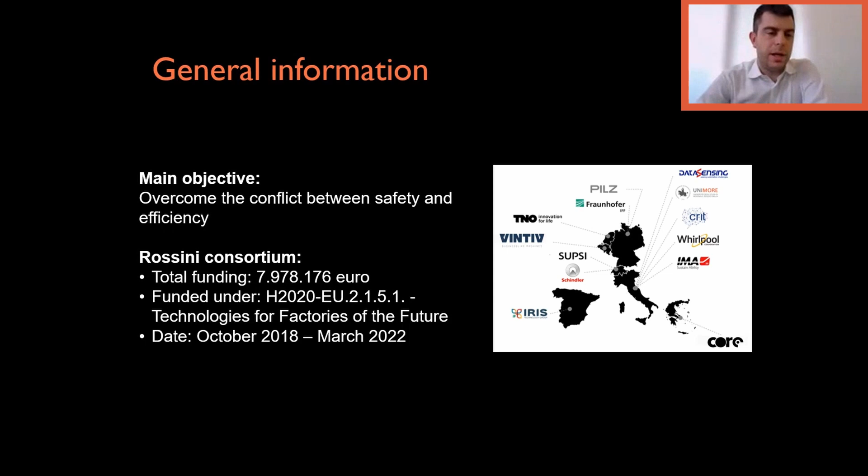In order to reach a goal as big as overcoming the conflict between safety and efficiency in human-robot collaboration, having on one side traditional robots that are very fast and efficient but not safe for the operator, and on the other side cobots that are intrinsically safe in the interaction with the operator, but very often they are stopped or not as fast as the traditional robot.

We understood that we were forced to work at multiple levels, not only on the sensing part of the cell and the environment, but also at perception level, cognition, and control level.

In the Rossini project, we did work on the sensing part as Datalogic, together with PILZ, developing 3D cameras and a cluster of laser scanner and radar that are basically collecting information from the field, used by the controller to allow the system to recreate and make different actions that are not possible with current technologies.

In particular, we are able, through our planner, to give tasks to the human and to the robot in their interaction, changing the task if we see that the operator, for example, is tired or a little bit slow compared to what's scheduled. Apart from that, we have a complete understanding of the scene, and we put all this information together with the semantic scene map.

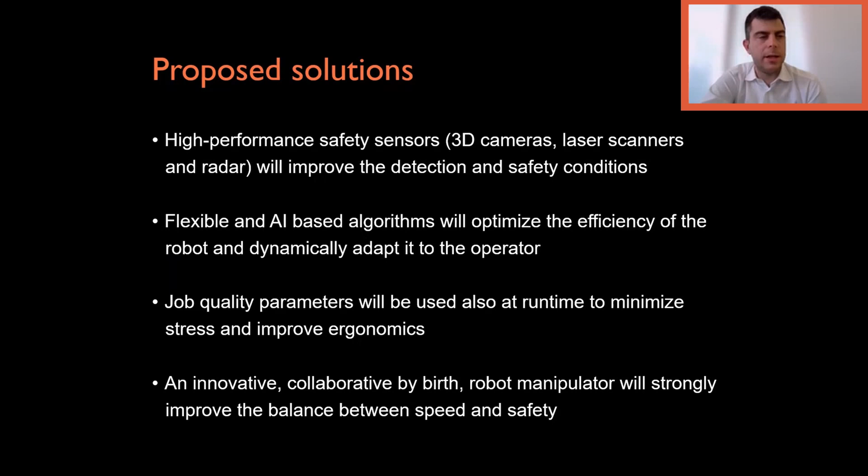At the end of the day, all the technologies that we have developed are used by our use cases. The three use cases cover a large range of human-robot collaboration applications within the manufacturing industry, but many of the technologies are applicable in different fields.

Project Rossini is unusual, so usually for people familiar with funded projects, they are coordinated by R&D centers or universities. In this case, it has been coordinated and led by industrial partners.

The idea from the very beginning was to develop technologies able to solve issues in different problems in different fields. This was the main idea. So while selecting the use cases, we worked with entities with different problems or different interactions with the robotic manipulator.

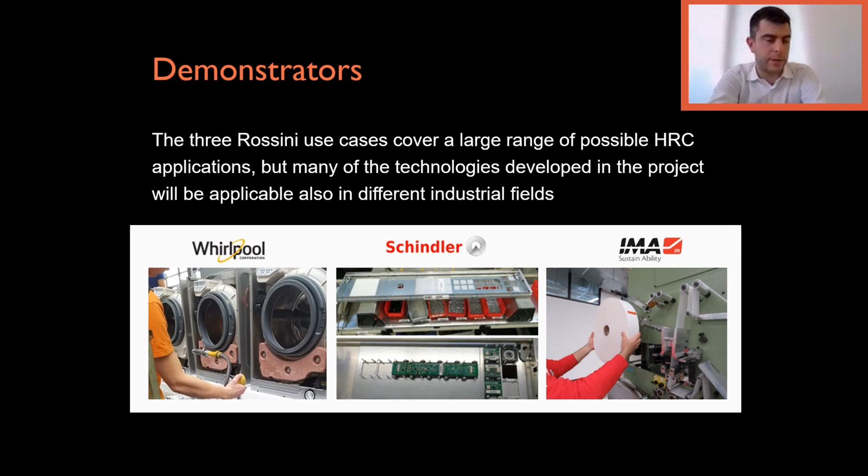If we look at the challenges we face with the project: in the Whirlpool use case, as you will see, we have a continuous flow line working with heavy products at high speed. This is very challenging because you have to consider a high payload on one side, placed at a certain height that is dangerous for the operator, and the high speed of a continuous flow line.

The Schindler use case is more close to the traditional application for cobots, and here the main challenge is the high production variability. The IMA use case has challenges that are very different from what's seen in Whirlpool and Schindler.

In this specific use case, we have to manage indoor navigation and the interaction between the robot arms and the operators. So on one side we have the navigation, and on the other, to control multiple arms in a specific area that is shared with multiple operators.

I leave the floor now to the three use cases. This presentation is dedicated to them and the solutions that have been developed within a project that is close to its natural expiration, at the end of this month. So I want to thank Riccardo and all the use cases, and welcome again to this presentation about Rossini and the technologies developed for its use cases.

Thank you very much, Matteo. And so now let's start the use cases illustration with Miroslav Hornicak from Whirlpool, who will explain how the Rossini solution has been applied to a domestic appliance assembly line.

Okay, thank you very much. So I'm Miroslav Hornicak. I'm from Whirlpool EMEA Corporation, and I'm an industrial engineer. I was responsible for the Whirlpool use case.

So, needs and challenges, as was presented before: our use case involves a heavy payload. At the beginning of the project we had two different possibilities, because in our location we manipulate heavy payloads with these concrete counterweights in our products.

So we have two, as I said, different options: one is stop-and-go, and the other continuous flow. The main goal is that in the current state the operator needs to manipulate it - take the counterweight from the container, assemble it to the washing unit, and fix it.

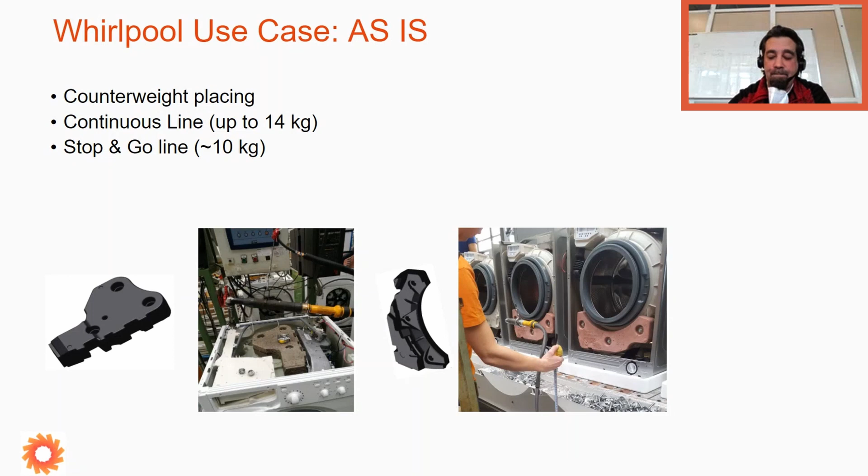The objective of our project, our use case, was improving job quality and, first of all, the ergonomics of our operators, because as mentioned before, the payload of one counterweight is approximately 14 kg, so it is really heavy and not good for the operator's health.

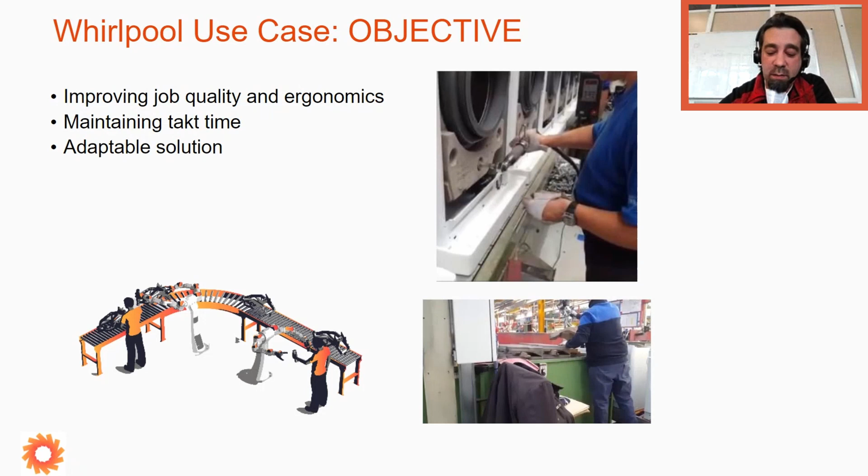What we wanted to solve during our project, and the big challenge, was this heavy payload for the robot, because when we calculated the final payload compared with the 14 kg counterweight and added the weight of the final gripper - an important part of our use case - it came up to 40 kg, not 14.

Respecting the takt time, for the Rossini solution we foresaw one big robot arm driven by the RS4 system. Our first goal was the standard industrial one, and to redefine how we work with this counterweight - since we will replace the hard work of the operator, we need to redefine the work for the operator as well.

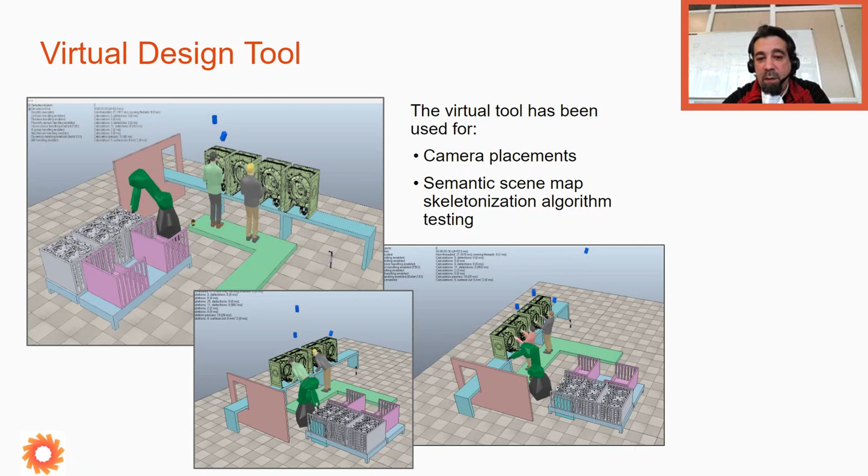So what we used during our mission in this use case was this: at the beginning, the virtual design tool to find the right placement of the camera, using the semantic scene map, skeletonization algorithm, and all the testing in the virtual world before we finalized our layout.

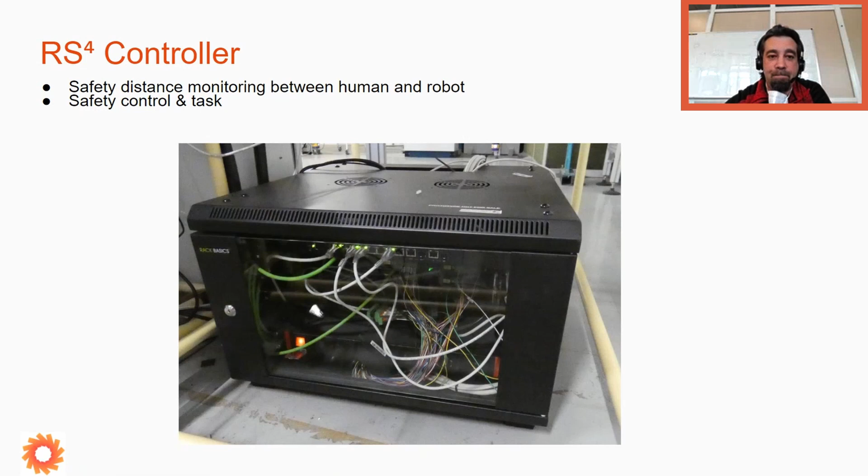Then an important part of our solution is the RS4 controller, which takes care of all our safety aspects, all our safety tasks, and monitors the distance between the human and the robot.

This RS4 controller is connected to Datalogic 3D safety cameras, which are placed according to our virtual tool in a specific construction to cover all our needs, from the dangerous zone and also from the collaborative point of view.

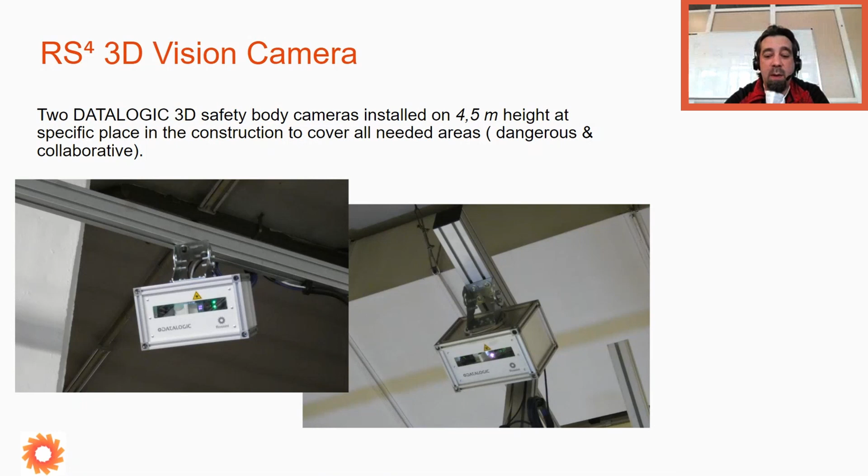Then in our use case we are also using standard laser scanners - three in this case - and these have two different functionalities. The first is to cover our whole workplace, to inform our system that something is inside and to monitor the area. The second functionality is stopping in dangerous and forbidden areas.

Next safety device developed in our use case is a soft skin developed by Pilz. We implemented this soft skin directly to our gripper, which now we can say is a collaborative gripper, because we used the FANUC CR35 robot, which is already collaborative, but during the assembly of the counterweight, according to this big payload, we need to turn off this collaborativity function of the FANUC. We replaced this functionality and put the safety functionality directly on the gripper, because this gripper is the nearest part close to the operator where we can react to these activities.

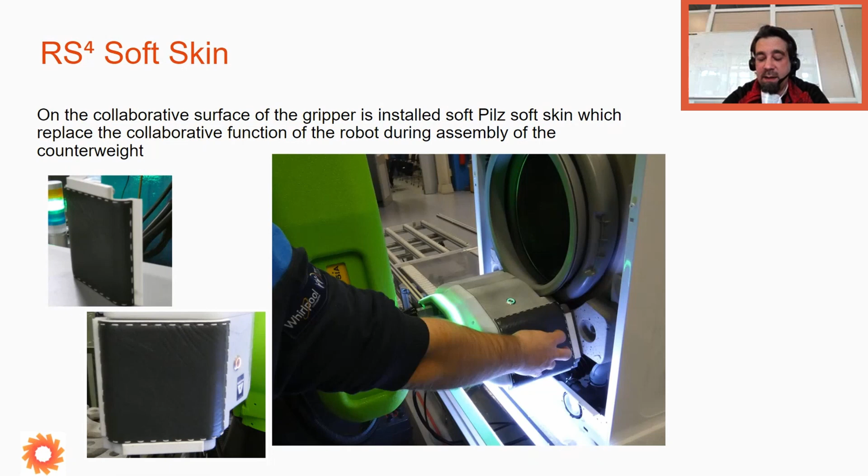In the continuous flow mode, we are under the safety speed, under 250 millimeters per second. So in this case, we can guarantee that our gripper, using this soft skin, is safe and collaborative.

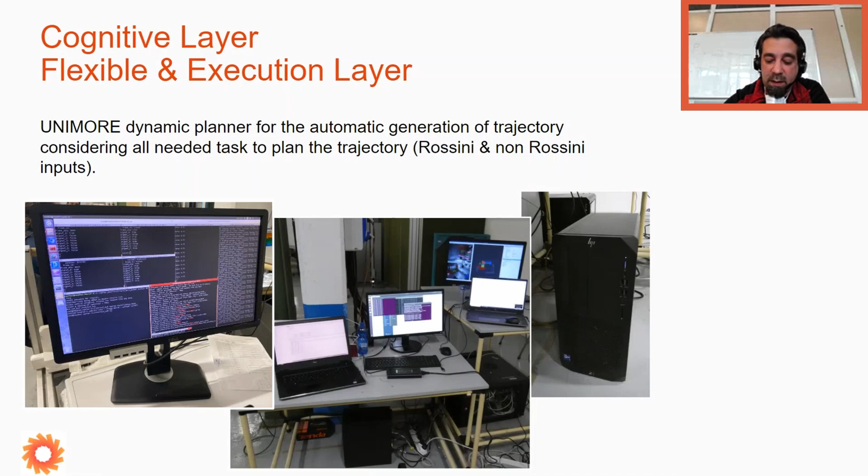The next part of the Rossini components we use is the WP4 PC, where we have installed the ROS system, and all this system is driven by the final motion planner and final execution layer. With ROS we control all the tasks about the trajectories of the Rossini inputs and non-Rossini inputs, because in our use case we are also using a lot of different inputs which are not connected directly to safety, like the camera system and additional sensors which control our final takt.

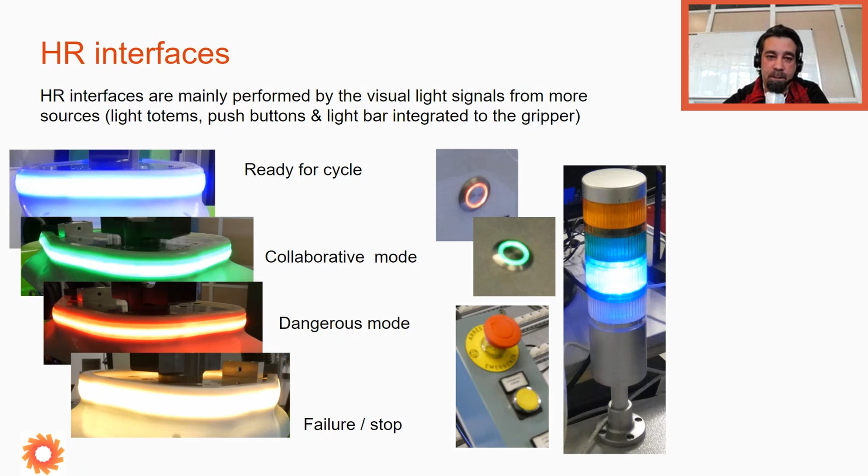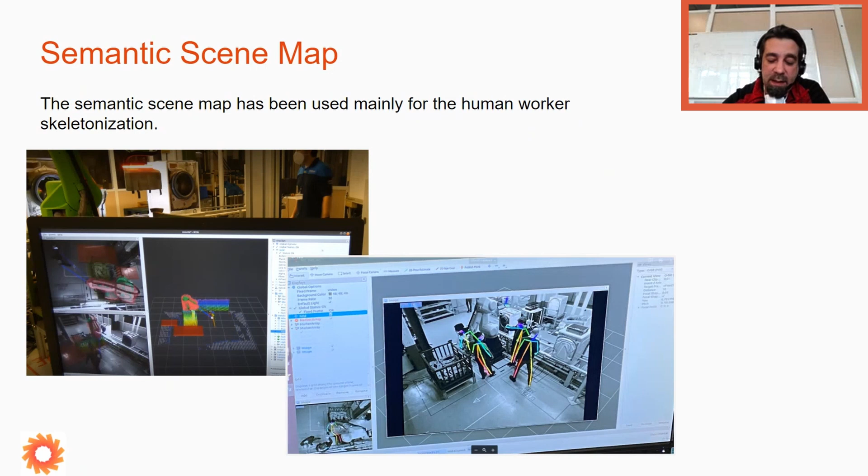This is our final use case. It is installed in our TWI area, which means training campus. I can briefly introduce you to the layout.

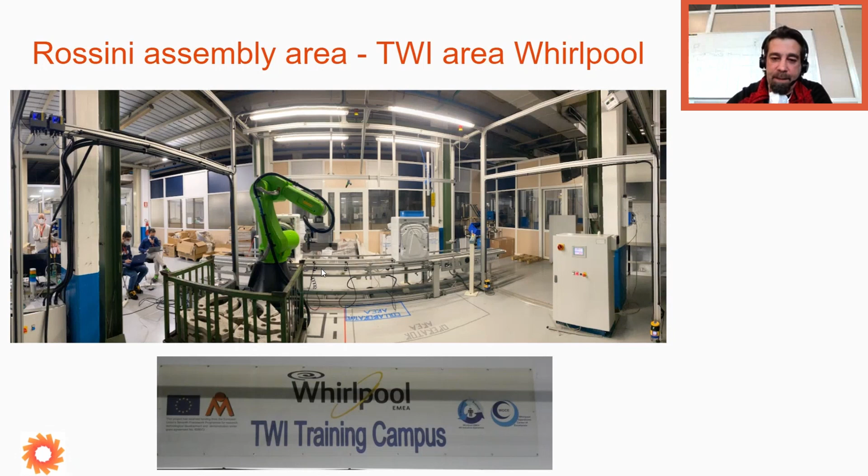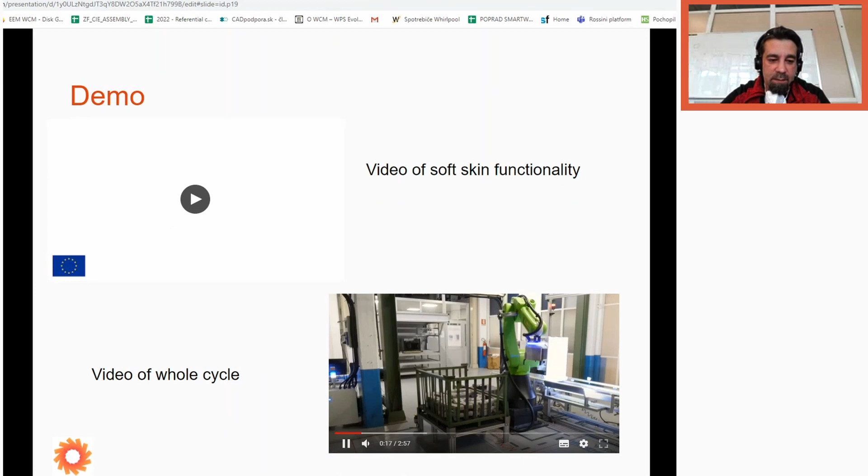Okay, and now I can show you the videos from our final integration. Just a second, I have some issue. Maybe I can do it a different way. Okay, now it's working.

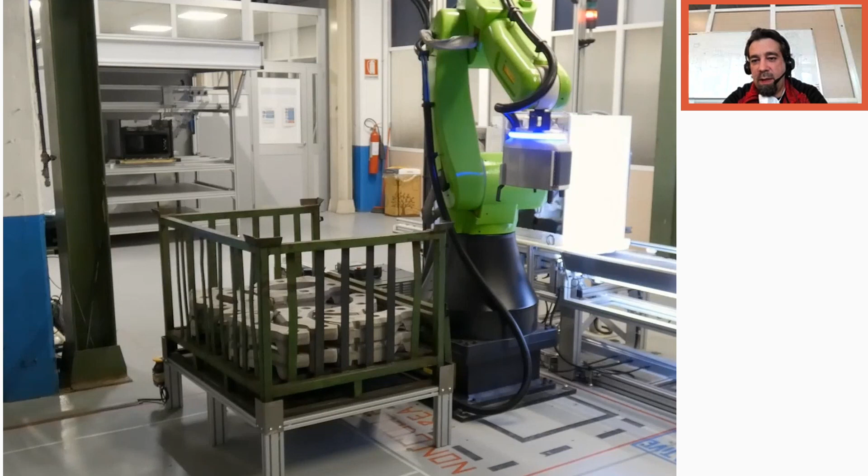This is a whole cycle. So now you can see the robot is prepared, the blue light is turned on, and we're waiting for the information from the line to start the cycle.

The washing machine is moved. When the robot goes inside our dangerous zone, meaning our pickup zone of the counterweights, the lights change. Let me explain the functionality of this safety scanner.

So when I go inside, as you can see, the robot was stopped. When I go out, the robot can move and finalize the cycle. So it is done automatically.

So we go on, down, turn on the suction system, and go up to the safety position.

Then when we are in the safety position, we close the gripper, so we are holding it in a safe way. This stopping is driven by the RS4 camera system.

We're going to the mounting position. So now the robot changed the rotation. The camera system finds the right coordinates. Now we're going to perform the final assembly.

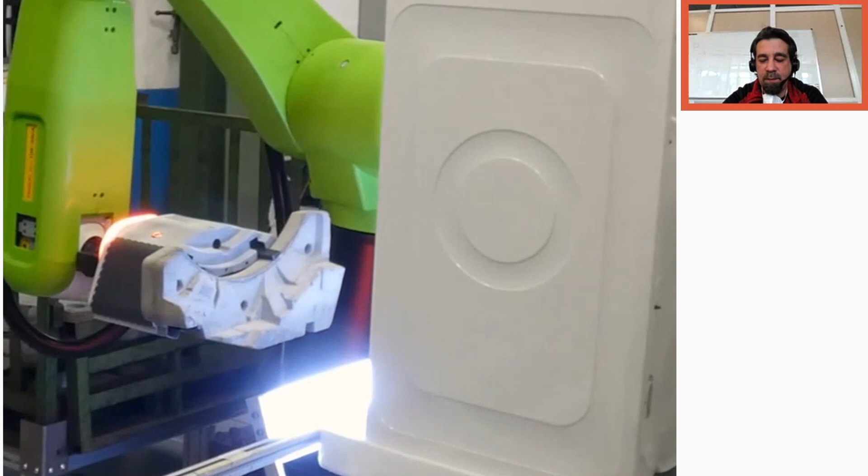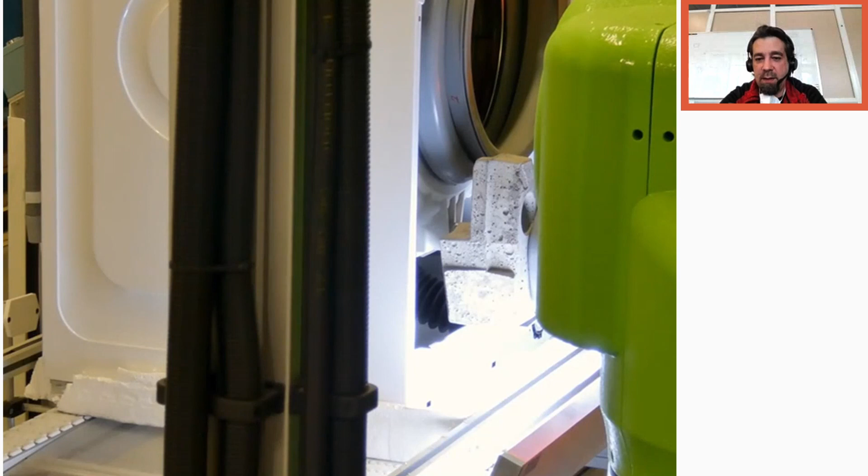We are still in the red, as you can see. Now, when the robot knows that we are safe, meaning nobody can touch or put their hand in, you will see we change the light to the green one, as you can see now. Also, the confirmation button changes. The operator fixes it and gives the information to the robot that it can go out.

And now I will stop the system if I want. When I go out, the robot continues to finish the cycle.

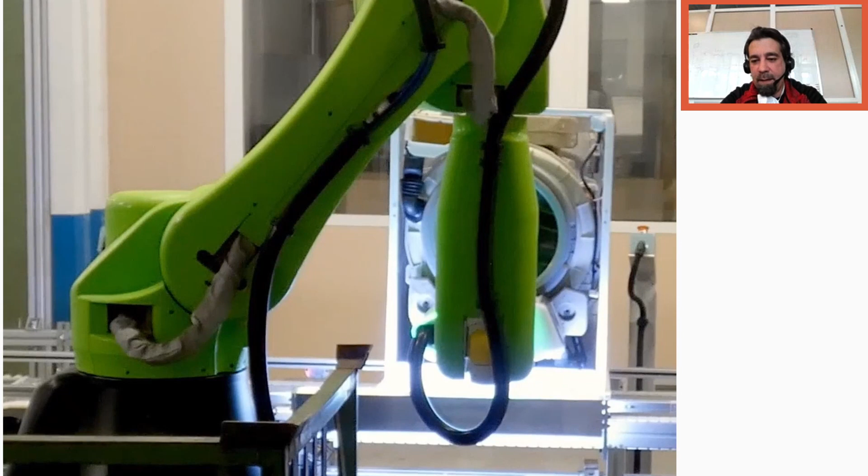And now I want to show you the functionality of the soft skin. So, as I said, when the robot is in the green zone, as you can see, when I touch the soft skin, the whole system stops and needs to be reset, and then we can continue, and the robot continues to finish the cycle.

Okay, the last thing we need to finalize is only some measurement which will be performed this week, and we will continue to finalize the final delivery. Okay, many thanks from me.

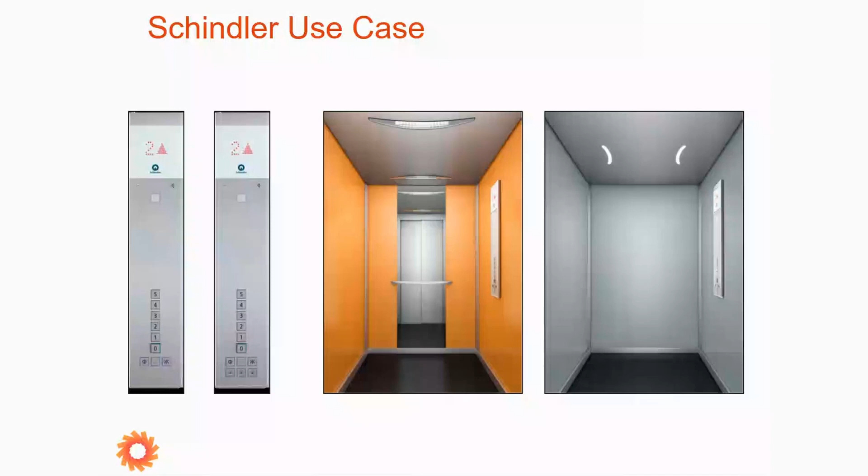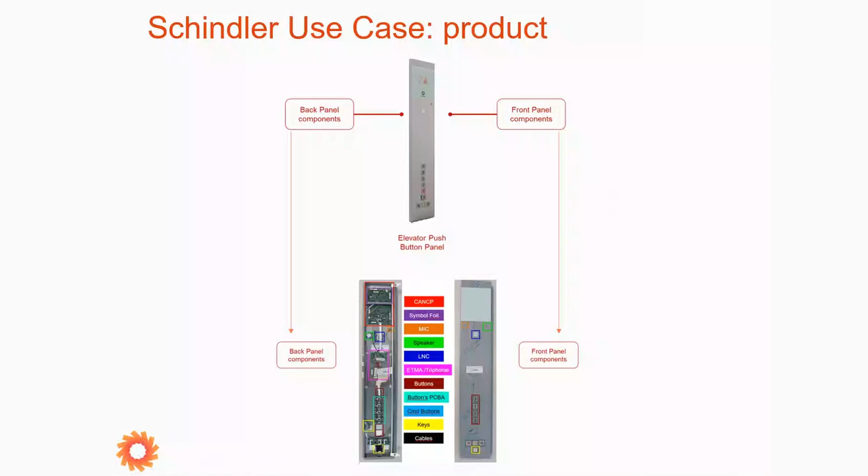What is the starting point? The starting point was to analyze a product made of two different sides, front panel side and back panel side, and the two sides have different components. Analyzing the type of product, we decided to find a way to implement a solution, a platform that can be a cooperative solution.

The particularity of this product is that it's a very extremely configurable product, with different types of components according to the number of floors, the number of keys needed, and the single application. So for Rossini, to simplify the demonstration, we focus on a configuration that is, on average, a product with 8 floors.

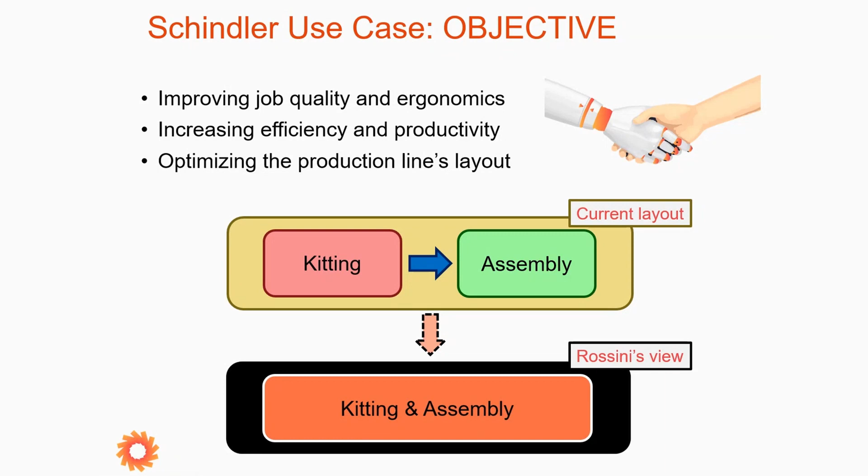As approach in the current layout, in general terms, the configuration is made by a kitting phase and then an assembly phase. With the Rossini, the objective was to implement a solution in which the kitting part and the assembly part will be together, with the aim to improve job quality and ergonomics, increase efficiency and productivity, and optimize the production line layout, making a new concept in general terms, because it's no more a line with different steps.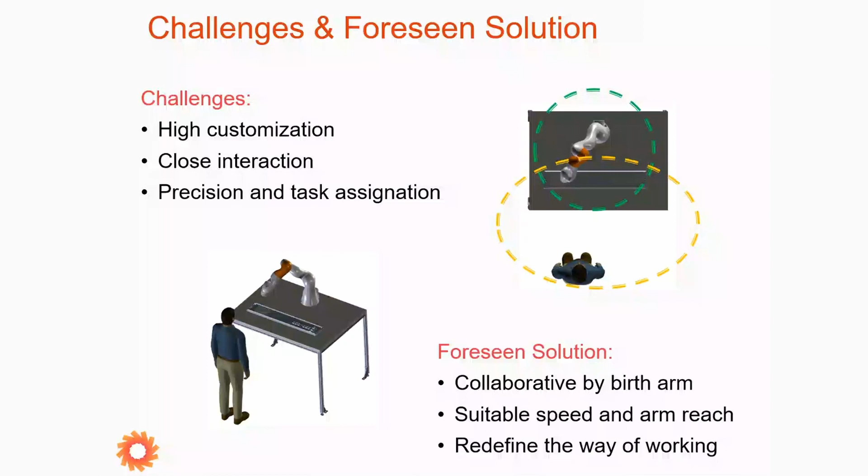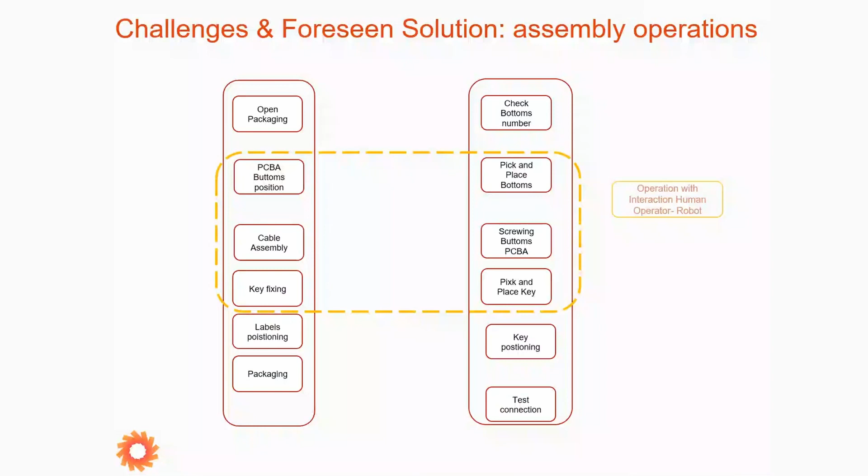To make this step, it was important to analyze all the operations we need to see on a panel and to divide the operations between what can be done by the robot and what can be done by the human operator. This analysis was done at the beginning, and there was also done ongoing analysis in order to define the equipments and also to verify we have some constraints about the position of some tools or fixtures related to the product.

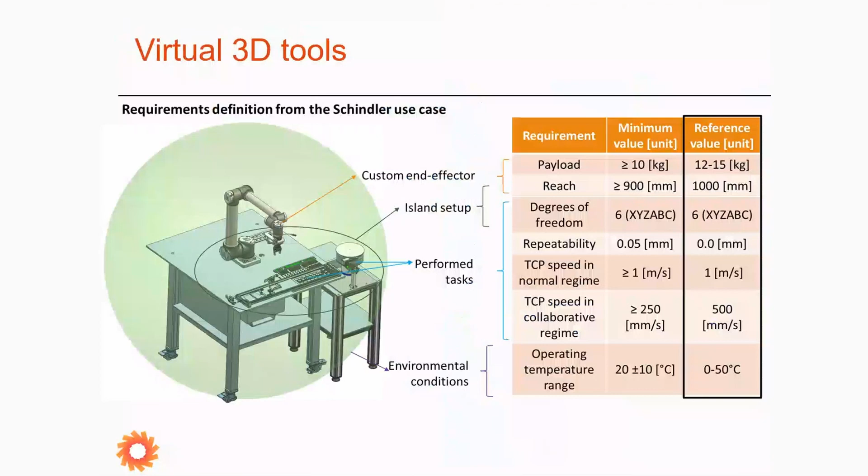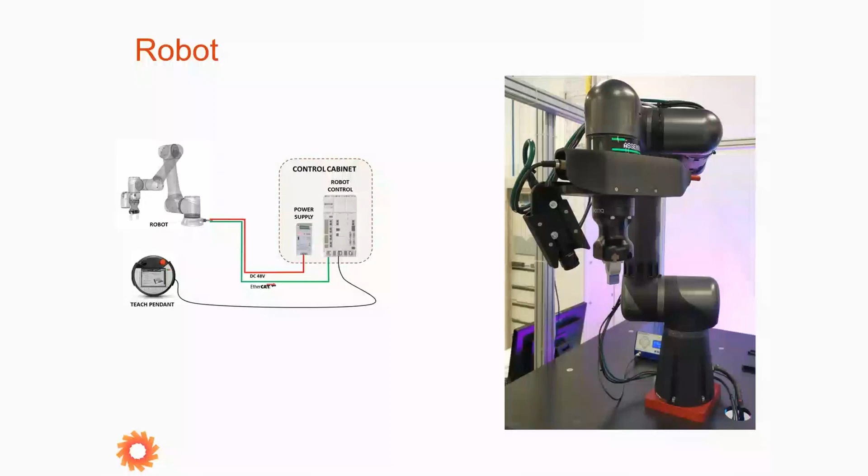On the robot, we decided to use some equipments that can be useful for the application, such as a screwdriver and a gripper by Robotiq, which is an electrical gripper. According to the division of operations between human operator and the robot, we decided to focus the robot's activity on the high repeatability components.

So we focus on the pick and place of the push button and the plastic face between the shaft material and the screw that is used to fix the pre-assembly frames plus the push button on the shaft material.

At the end, the current state of the demo is this one. We have a demonstration in which you can see the product in front of the robot, and on the right side we also have a singularizer, you could say, to divide the nuts to be taken by the robot, because the screwdriver, according to the dimension of the nuts, has no standardized solution available.

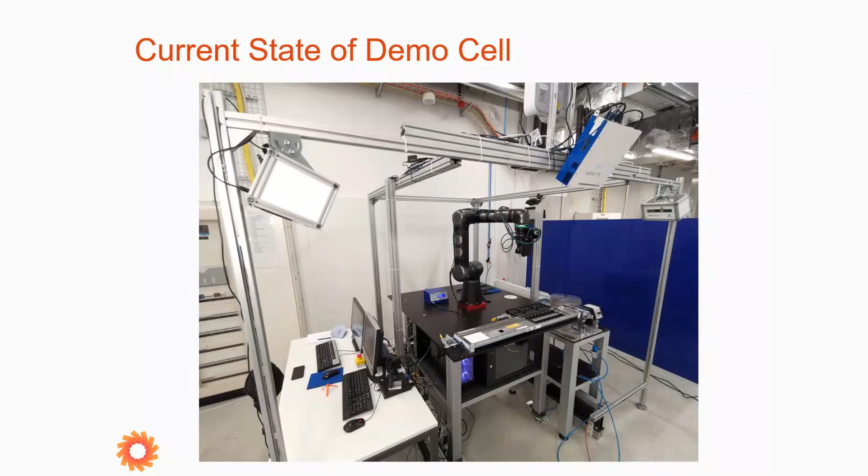We had to customize the solution to the dimension of the nuts, which is M3. As you can see in some pictures, and I'll also show you a video, the cell and the robot have a touchscreen with information related to the ongoing operation, and on the right side you can also see the output of the 3D camera.

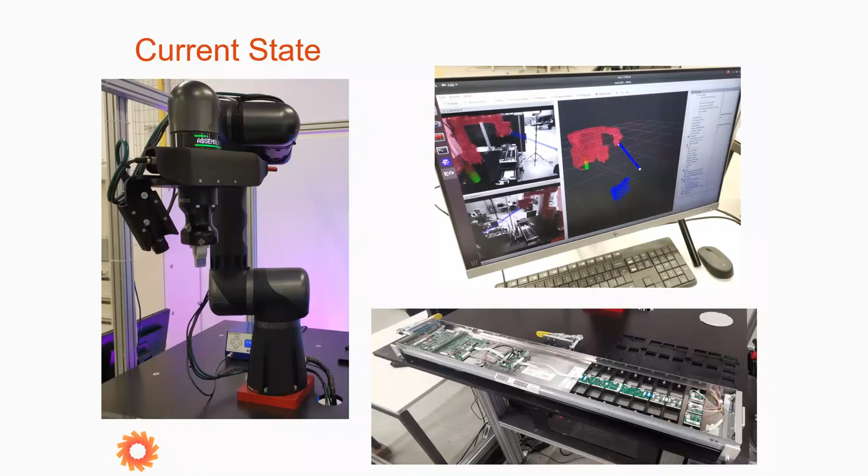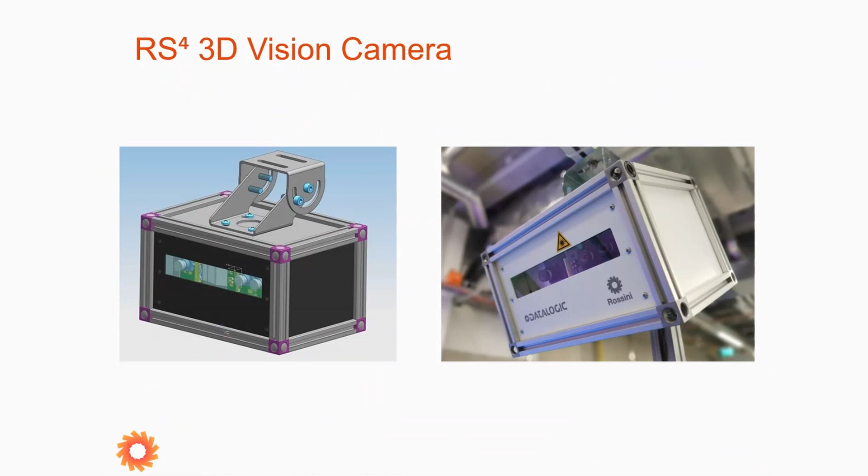That is also other equipment that I will show you right now, related to the safety of the human operator, because the platform, as was told before, has to guarantee the safest situation in this cooperation between the robot and the human operator. With the support of Datalogic, a partner in the consortium, a new camera was developed, starting from a 3D virtual concept, and on the right you can see the final solution.

With this camera, and also the activity of IRIS, simulations were done of the presence of a person in different situations. The human operator was simplified at the beginning, considering the skeleton of the human operator, and this simulation shows different situations in which the human operator could be near the robot, in order to understand the behavior of the robot.

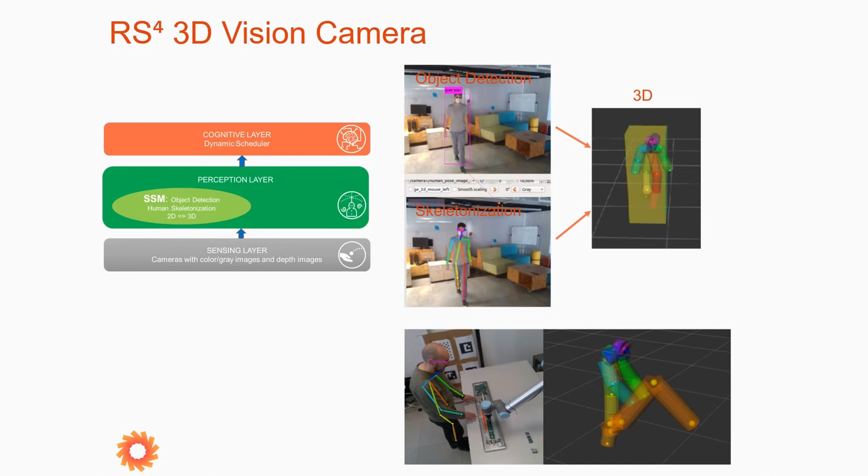Another important contribution by Unimore was to define and realize an algorithm that can understand, according to the movement of the robot and the unpredictable movement of the human operator, what the trajectory and behavior of the robot should be. So the robot has to be adaptive to the behavior of the human operator.

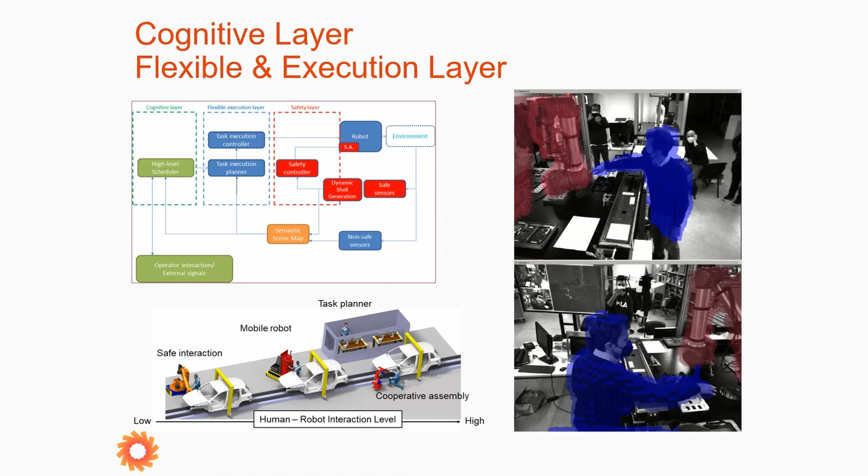This part was very interesting, because you have to imagine that some behaviors are not so easy to replicate, but we have to simulate as much as possible all the situations, and the robot has to change its trajectory according to what happens and how the human operator performs the operation.

At the end, I will show you the video in which you can see what I told before. You can see here the robot in the phase where it has already put the push button inside the frame. In this part of the video, you can see that while the robot is doing this pick and place of the plastic frame and the buttons on the shaft material.

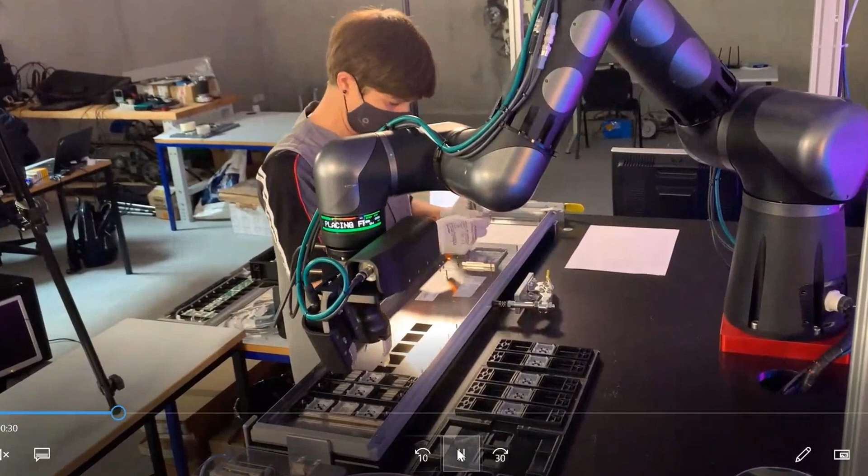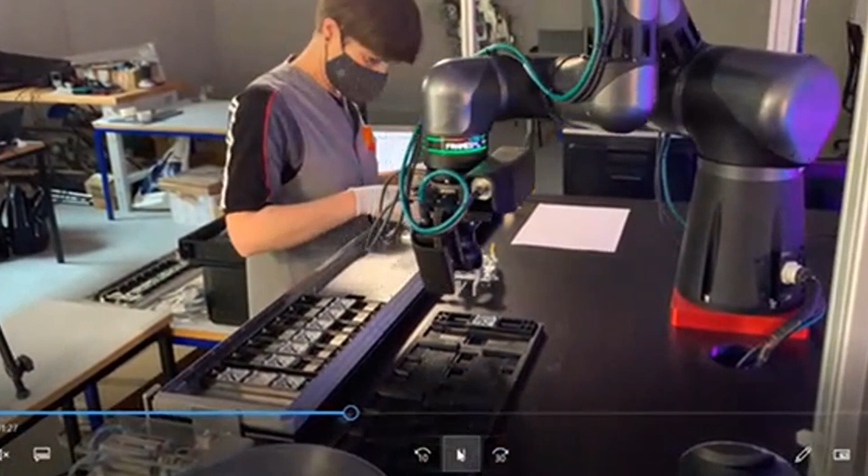On the left side you can see the operator in the assembly phase of other parts we have seen, customized parts, or cases where we have different labels to apply, and flat cables to manage and connect. The robot cannot do this operation with high repeatability. You can also see activity related to the PCBA, where you have to scan the ID barcode and then fix it on the shaft material, not in a planar way, but adapting it according to the conformity of the PCBA and the pan.

Here you can see now the screw driving of the nut while the operator is working. And as you can see, the space in which they are operating is very close.

Okay. So from my side, that's all.

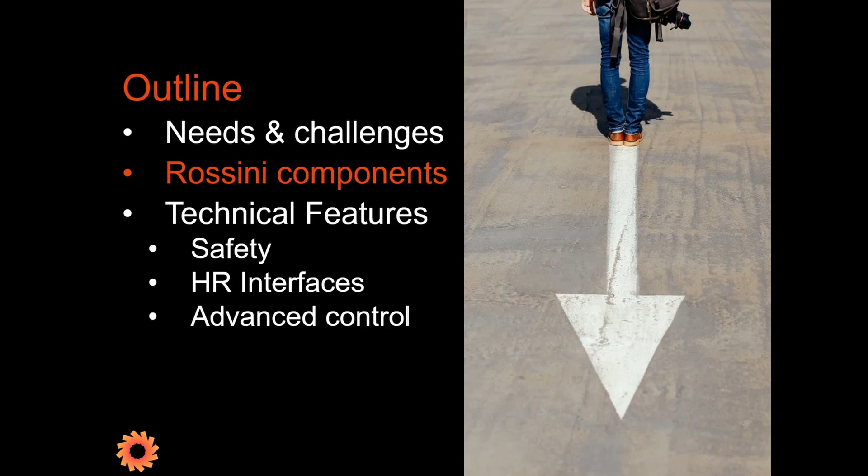So IMA is a world leader in the design and manufacture of automatic machines for the processing and packaging of pharmaceuticals, cosmetics, tea, coffee and food in general. In this use case, we focused on the tea bag machine. Just think that two-thirds of the world's tea bags are produced on IMA tea bag machines, so this is a very important machine for IMA.

We focused on the feeding material necessary for these machines, and in particular on the paper reels that are necessary to make the tea bag. So in particular we have three kinds of paper reels: the filter paper reel, the tag paper reel, and the outer envelope paper reel.

The reels are important in the packaging machine in general because this is a shape of feeding material that is not only present on tea bag machines, but in general a common shape present in different kinds of machines. So this is of interest because this use case can be applied to different kinds of automatic machines.

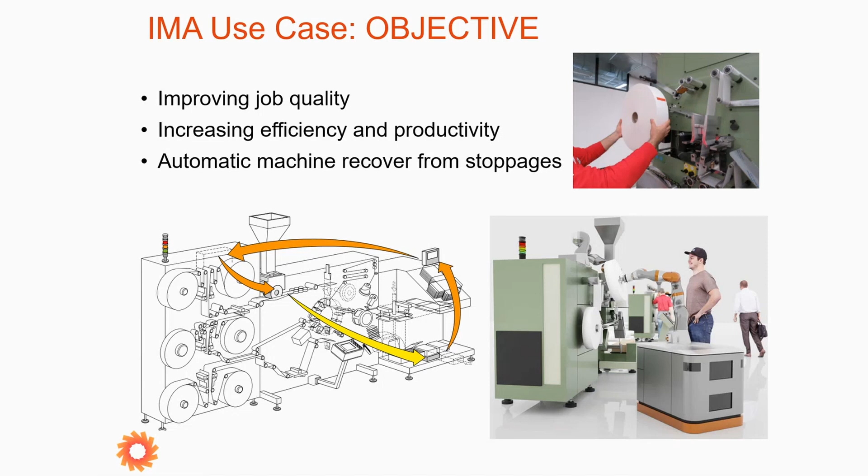The idea is to perform speed and separation monitoring in this use case, according to what is explained in the standard ISO TS 15066. In this use case, the most particular thing with respect to the others is the presence of a mobile base, an AGV, because the future scenario will be to share this kind of robotic solution as a mobile manipulator with multiple machines, in order to have a faster return of investment for the customer. So the idea is to monitor the area to recognize where the operator is and where the robot is, and to act accordingly.

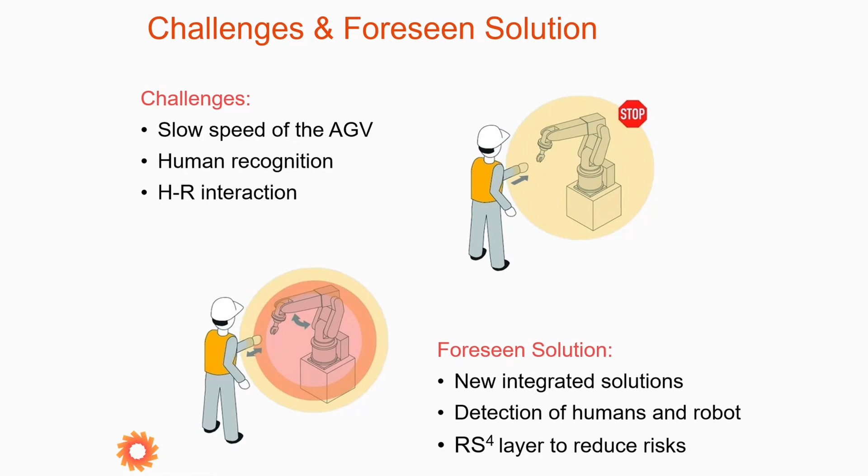Let's talk about the components of Rossini used in this use case. As in the other use case, we used a lot the virtual design tool from Iris, a virtual tool necessary to simulate the environment in order to find, for example, the best places for installation of the sensors. In this picture you can see the 3D model of the automatic machine, the warehouse where the reels are stored, the operator, and the mobile manipulator. These blue cubes are the cameras, and below you can see the 2D image detected by the cameras.

The idea is to use this kind of tool to check if all the areas are covered well, and also this can be used for testing, for example, the skeletonization algorithm of the semantic scene map.

Another important feature applied in the use case is the Rossini Smart Safe Sensing System, the so-called RS4. In this picture you can see the RS4 controller, and on the left and right the semantic map controller. The RS4 system is responsible for doing speed and separation monitoring: the operator is detected, the robot is detected, the minimum distance between them is evaluated, and with this data the speed of the robot is regulated.

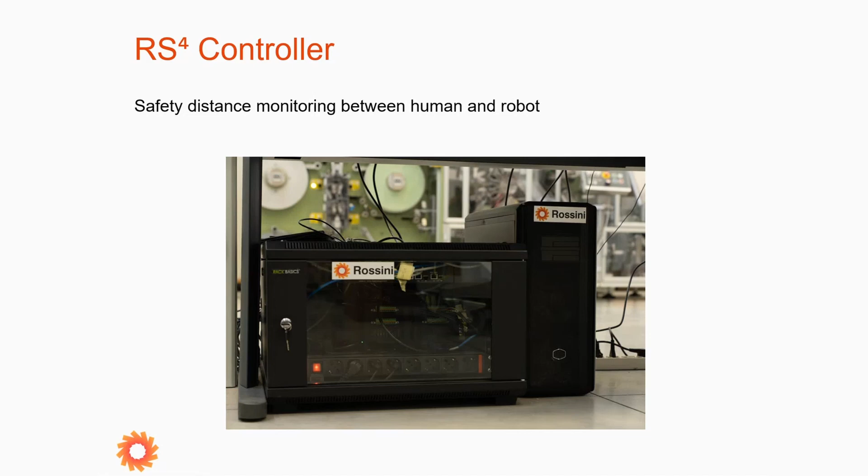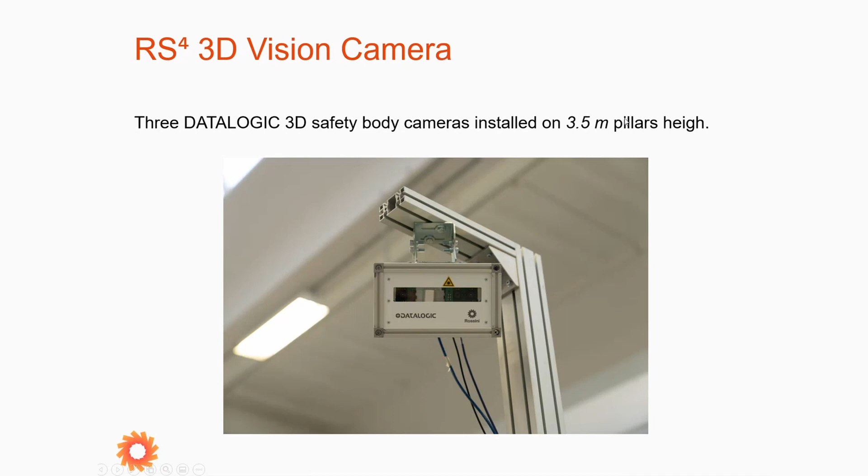In the use case, 3 Datalogic cameras were installed at a height of 3.5 meters on aluminum pillars. Here you can see one of them. The other RS4 sensor installed in this use case is the PILZ radar, installed in the area of the reloading of the machine to better cover this zone, because here the operator and the robot work very closely, so it is important to monitor this area well.

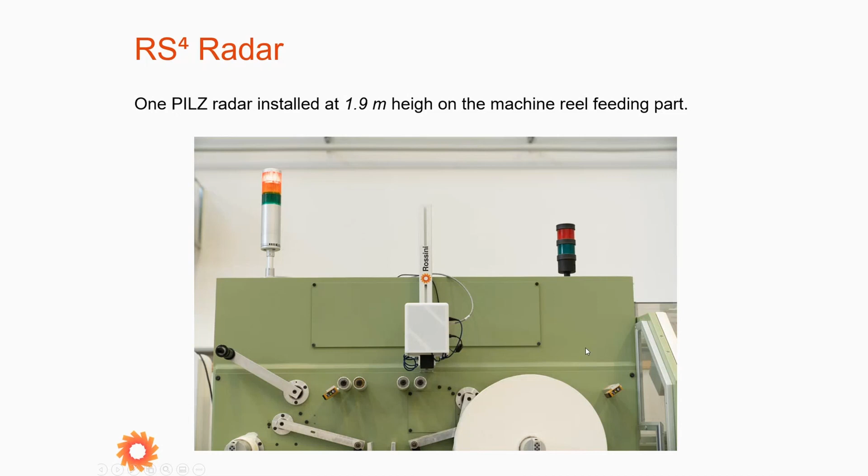In the IMA use case, we also use the cognitive layer and the flexible execution layer. For the flexible execution layer, we use a lot the dynamic planner of trajectories. The trajectories are not given through waypoints as in a standard robot, but are computed automatically, giving only the start point and final point, along with the obstacles of the machine. For example, in this picture you can see in green the obstacle represented by a sphere, and the computed trajectory avoids the obstacle to prevent collision.

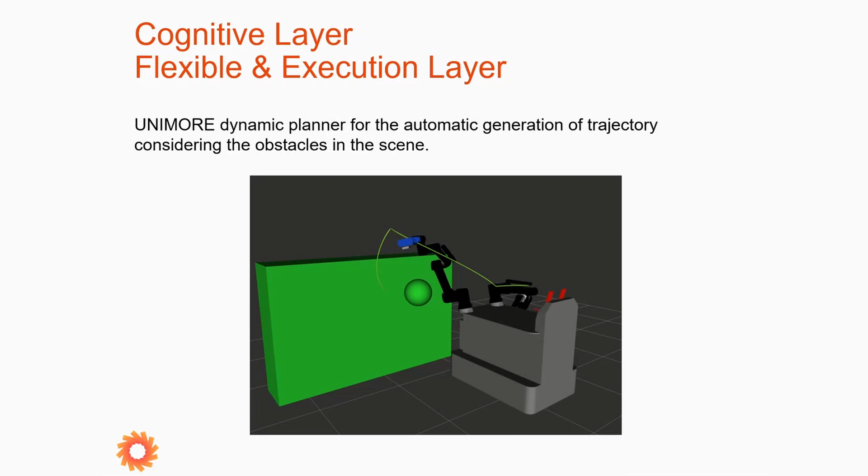This is a very important feature used for all the trajectories we perform in the use case. About the semantic scene map, in the use case we apply the skeletonization algorithm, because the idea is to use the 3D beams of the skeleton to replan the trajectory if, for example, the operator puts an arm in a zone where the trajectory was planned before. So the robotic arm can avoid the operator by computing a new trajectory.

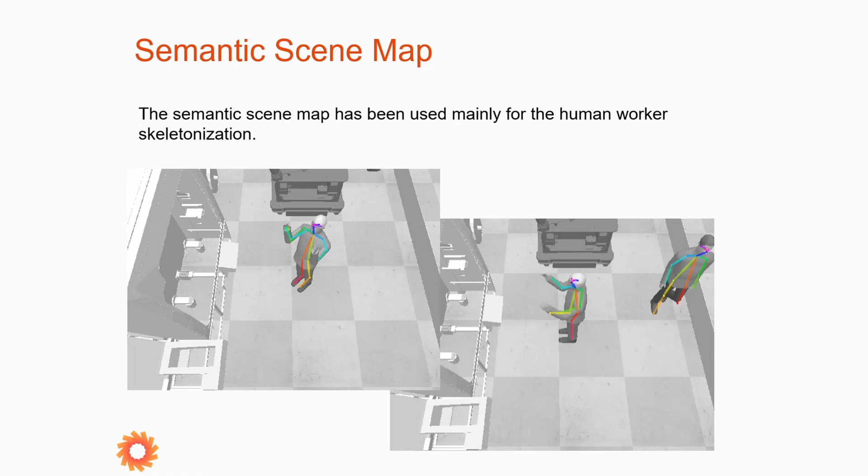Another important component used in IMA was the design tool for human and robot collaboration, and the software for flexible task assignment.

Together with the collaboration of TNO, we evaluate the physical load related to the real task, and we see that it is very important in terms of job quality. Taking the data about the duration of the reels and about the ergonomic aspects of the loading position of the operator, a rating was established for the different tasks, and through the Rossini task planner, we assigned the task to the robot or to the operator using this rating.

It is very important, the task scheduler, because it can also consider if the robot is busy on one machine, it can assign the task related to another machine to the operator and vice versa. So again, thinking about a scenario with multiple machines served by a mobile manipulator.

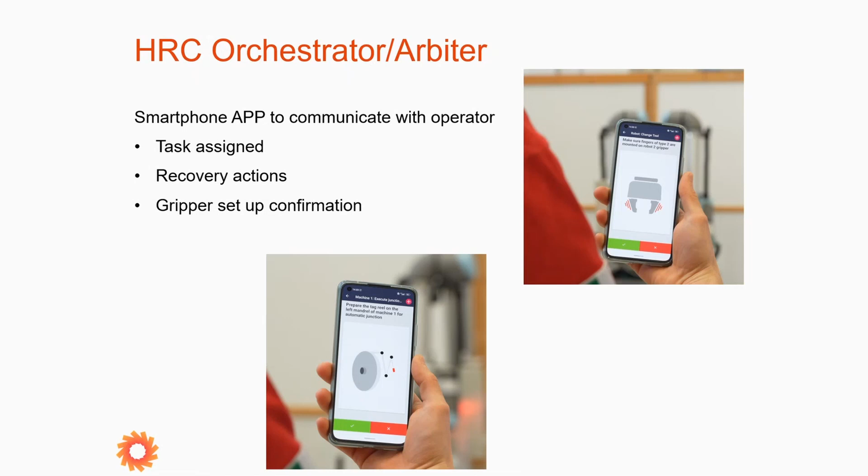Here I will go through the demo technical features, and then I have a video of the whole demo.

Talking about the mobile manipulator, it is composed, as you can see in the picture, of an AGV - in this case, MiR500 - and two robotic arms from Universal Robot. All the integration has been performed by IMA, integrating the AGV together with the two robotic arms.

We used on one robotic arm a gripper for the reel loading, and on the other a 3-finger gripper to remove the reel core. We decided to use this kind of gripper on the other arm too because it will be very useful to test the micro stoppage solving.

And there are also cameras. Here you can see HD cameras on the robot to detect with high precision the position of the reels or of the mandrels of the machines.

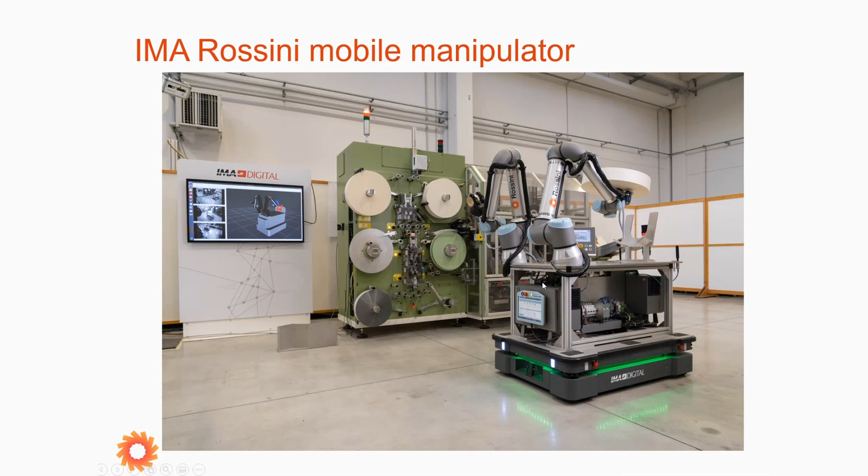In this picture, you can see the arena where we are testing the different tasks - the 3 cameras from Datalogic and the radar from Pilz. You can also see the real warehouse, the machine, and the mobile manipulator.

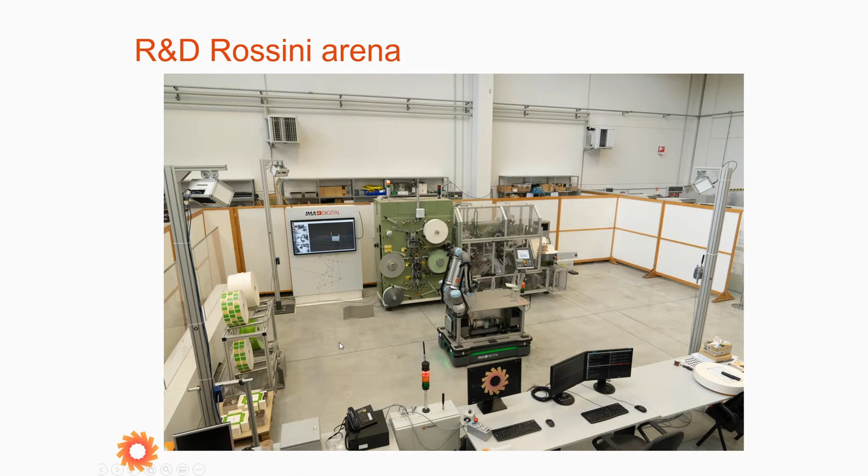The last thing very important is that all the components are integrated in the Rossini framework - that means all is communicated via ROS: the robotic arms, the AGV, the grippers, and so on. This brings an easier data exchange. For example, in this screen, we can visualize all the information coming from the different components - the cameras, sensors, and so on.

So here I have a video of the demo we performed. The first part is related to the human-robot communication.

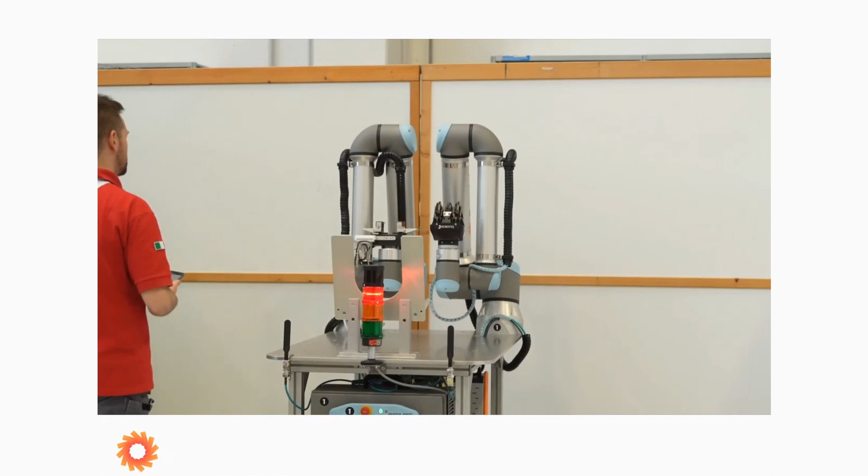Here there is an example of the tool, the verification of the gripper setup. So if it is the first run of the day, or if the previous reel was different from the requested one, the operator has to look at it. This is a task given to the operator.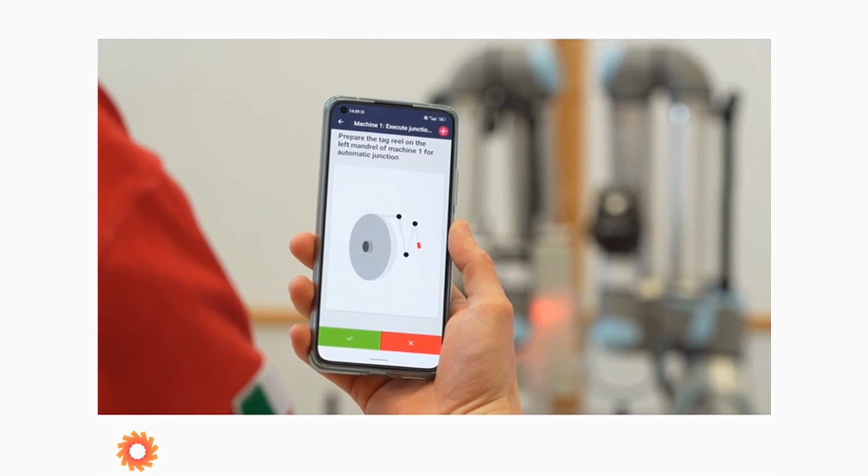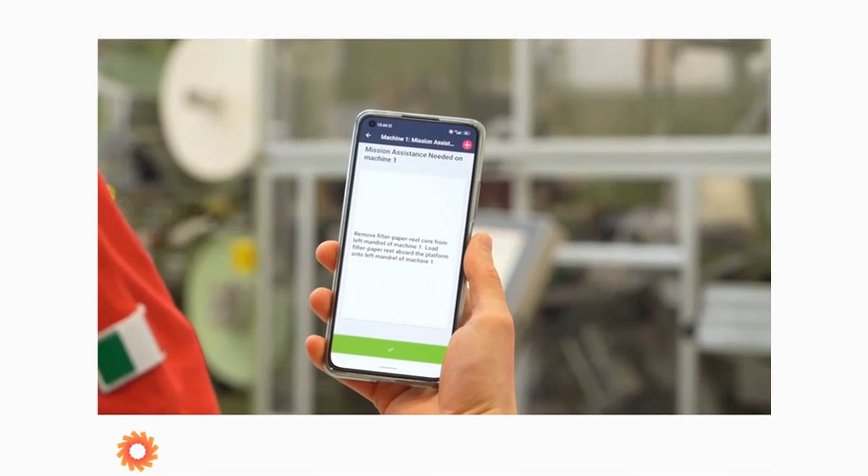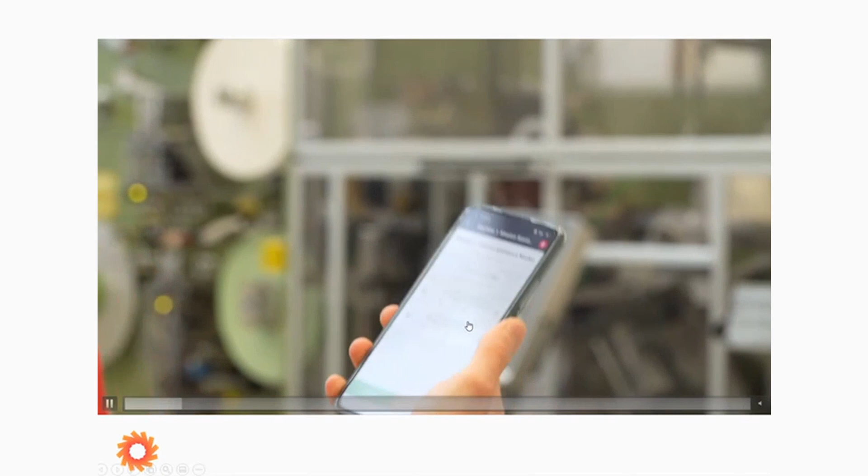For example, the preparation of the junction of the reel, which at the moment is done manually by the operator. This is an example of mission assistance needed from the robot, and it is important to see that different explanations are given to the operator to recover the situation.

Here instead you can see the reel picking with the RS4 monitoring. The process is the following: the AGV approaches the reel warehouse, and the navigation is done with the arm stationary, so the safety is managed by the AGV.

When the AGV arrives at the reel warehouse, via ROS, the AGV triggers the monitoring from the RS4 controller, and the distance between the operator and the robot is evaluated. You can see, for example, now the tower light is green, so the distance is enough to have a full speed mode for the robotic arm. Instead, when the operator approaches, the reduced speed mode, as in this case, is activated, and if they are too close, the safeguard stop is triggered.

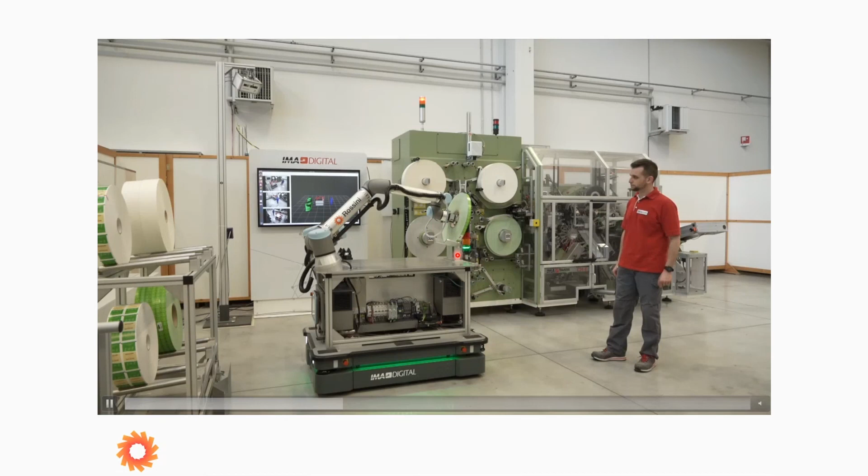Here you saw a human touching robot condition, so the robot goes into a safeguarded stop. This is a very important feature because in this situation we avoid a clamping situation between the reel and the perch on which the reel picked by the operator lays. This is very important for the risk assessment.

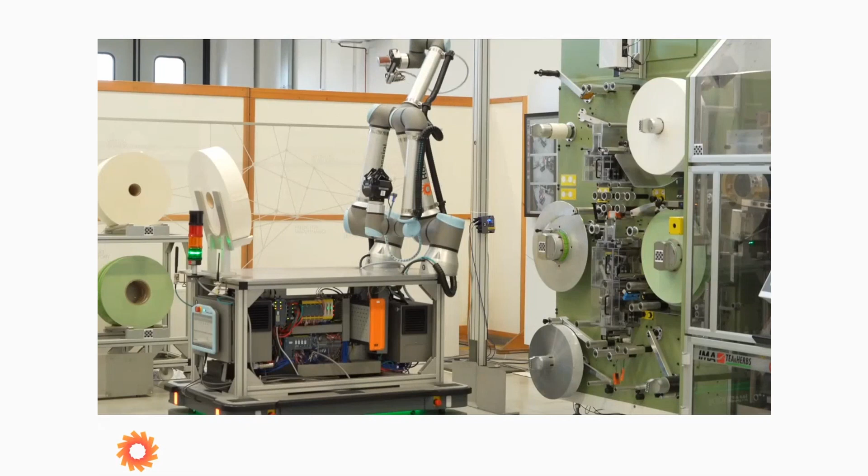In this case, you can see another condition of a human touching robot, and the safeguard stop works very well. After the mobile manipulator picked up the reel, the AGV navigates toward the tea bag machine, and then, as in the previous case, when the goal is reached, monitoring of the RS4 controller starts, and the robotic arms can start moving.

Also in this case, the cameras are used to detect, for example, the machine, by looking at markers attached to the machine itself. When the marker is detected in the virtual scene, the 3D model of the machine is spawned, and the trajectory can be performed considering the obstacle given by the machine itself.

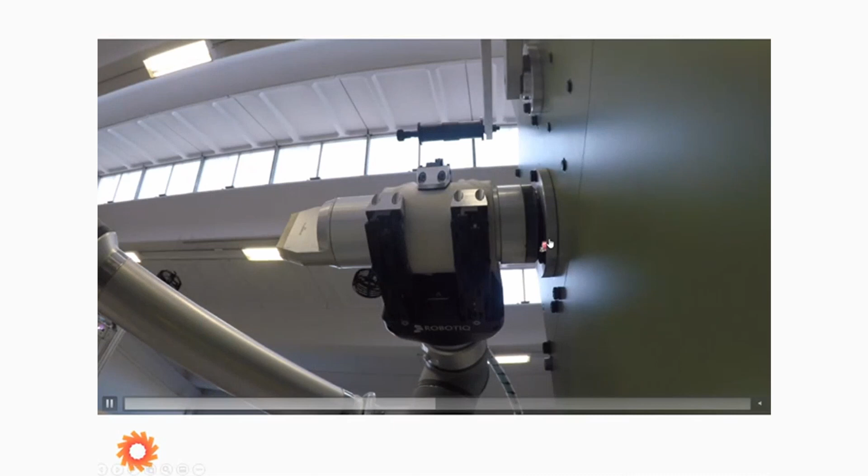Here you can see a real reel removal from the three-finger gripper. Important integration work in the use case was done with help from the University of Bologna, to integrate this technology in the specific mobile manipulator we are using, because we have two arms, so the dynamic planner of Rossini has to be shared between the arms, in order to have distance monitoring work for both of them.

The reel loading is important because after the reel was loaded, the operator has to perform some actions on it, such as setting the mechanical lever to verify the level of the reel. So the operator has to move this kind of lever and place the reel in the correct position on the mandrel. So now, for example, the reel is loaded.

The operator approaches, and at this moment the reduced speed mode is already triggered, and now it's stopped, and the operator can do all the things needed to make the reel workable for the automatic machines. All the trajectory to come back to the home position is computed with the visual dynamic planner.

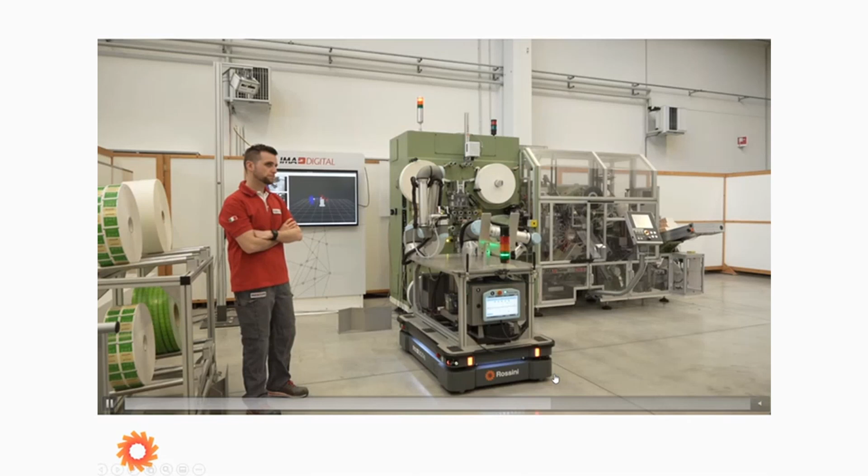Just to show you another case, this is another kind of reel loaded, the middle one. We tested it in the IMA use case. It's interesting because the operator sees, for example, that the reel doesn't go very well into the mandrel in terms of orientation.

So our technician goes to solve this kind of problem without looking at the behavior of the robot. The robot stops and the problem is solved. As you can see, the monitoring works very fine.

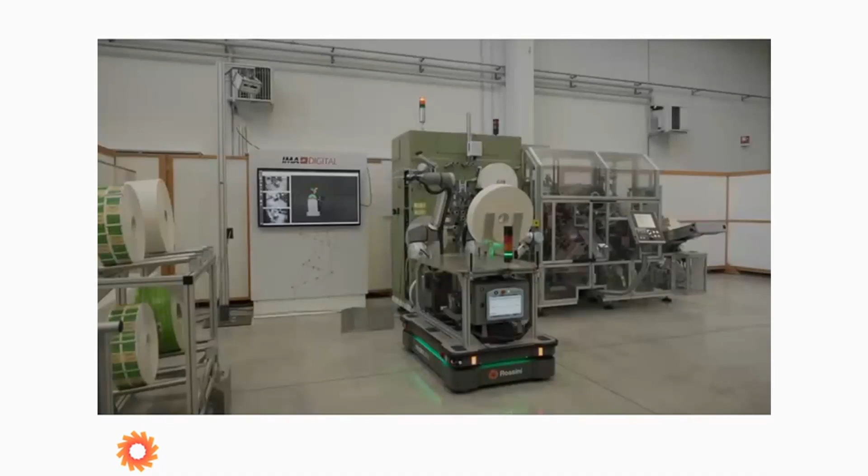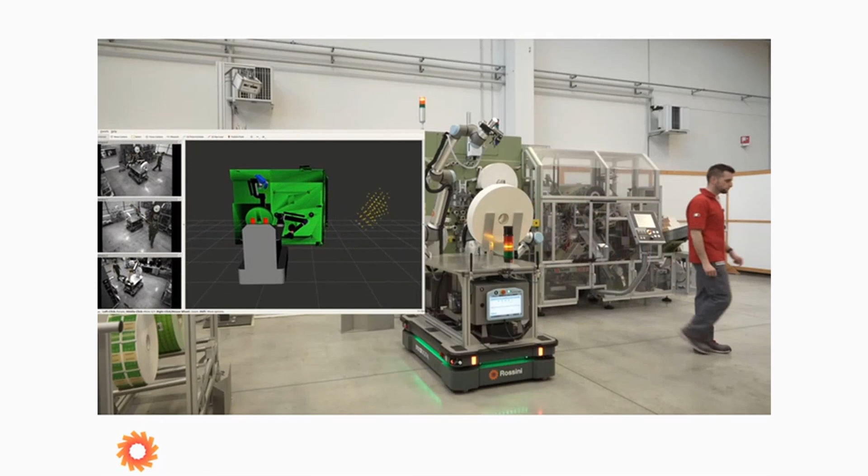This is the monitoring performed by using the cameras from Datalogic. Another sensor we installed is the pulse radar, and also in this case we performed human robot labeling in order to do speed and separation monitoring. You can see, for example, in the virtual representation, the point cloud of the moving robots, with the center point depicted by a pink cube for the robot.

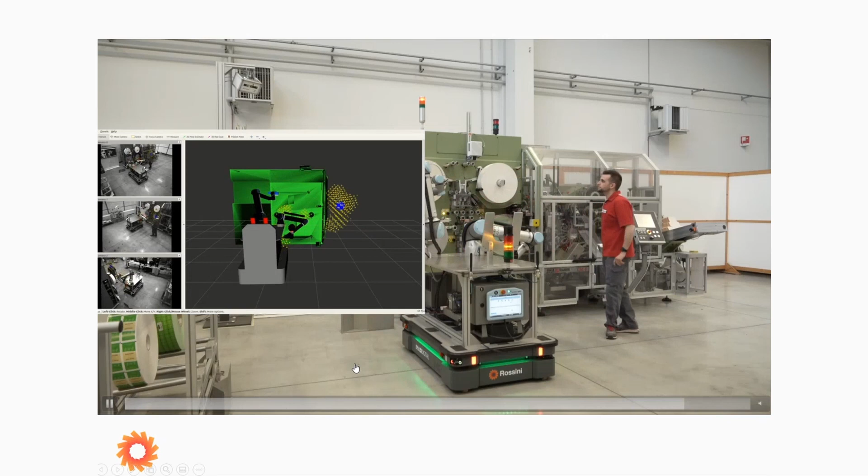Instead, for the human operator, a blue sphere is used. So you can see that the human robot labeling is performed well. Also in this case, we can use the data of the distance and direction of movement to perform speed and separation monitoring.

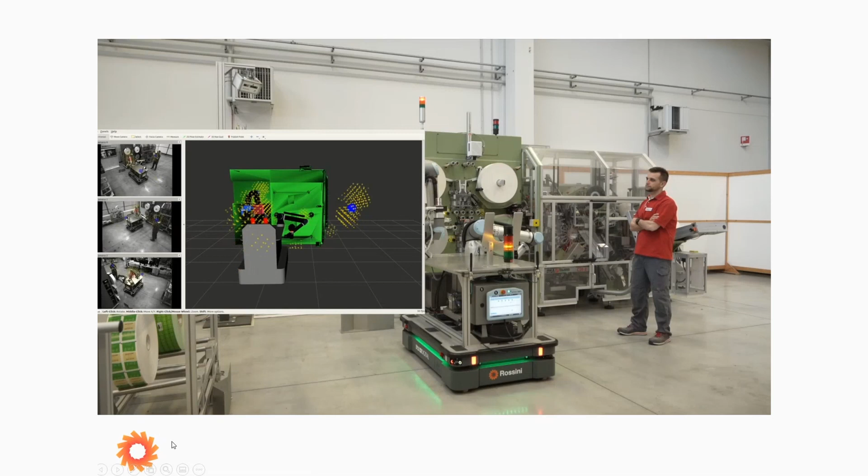I didn't put it into the video, but we also tested the trajectory scaling algorithm developed by Unimore, which takes into consideration not only the distance between the operator and the robot, but also the direction of movement. So we can slow down the robot only if the operator and robot are coming toward each other. In this case, the speed of the task increased because there are fewer stops of the robot.

Finally, this is an example of the skeletonization performed by the semantic scene map for the IMA use case.